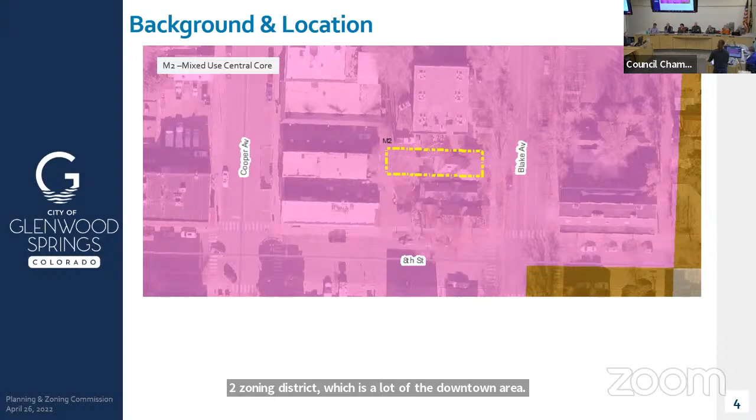And so just some background: this is the property location in yellow. Everything that pink color is the M2 zoning district, which is a lot of the downtown area—mixed use central core, so residential and commercial uses. And then this is just the same image without the zoning, so you can see it's next to the Manor building.

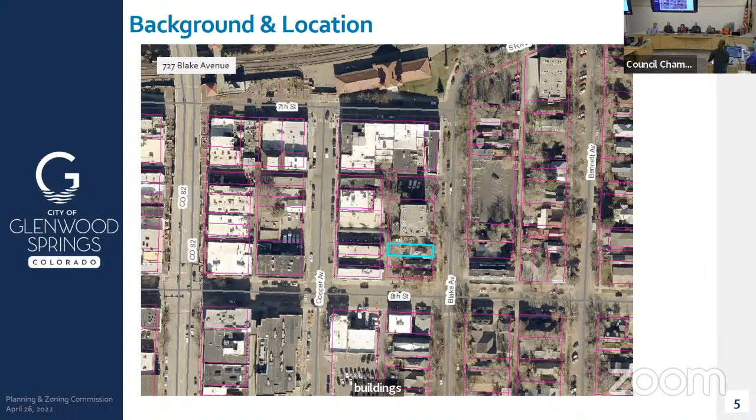Anyway, one of the taller apartment buildings. 727 Blake. So one thing about this application is this structure has already been built. It's noted that in your staff report.

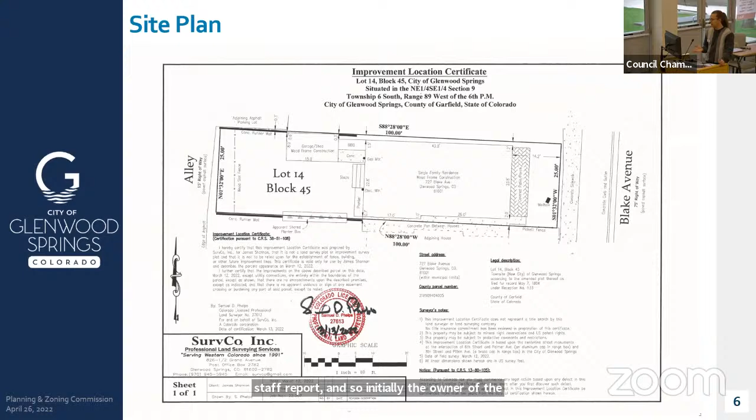Initially, the owner of the property approached city staff and asked about building an accessory structure, a shed, in this location. This is in the M2 zoning district, and here's a picture of it.

That's for primary structure. Accessory structures are held to their own specific setbacks, which includes 5 feet from the side. So the owner asked staff where he could place his shed, and staff explained you can put it right up to the lot line in the M2 zoning district. This shed is smaller than the size required for a building permit. Based on that response from staff, the owner in good faith went ahead and built the shed.

Later on, through further staff review, we found that since it's an accessory structure, it technically still needs to be 5 feet from the side setback, which is what prompted this variance application, because it would need to be officially approved to be there. Otherwise, it would not be.

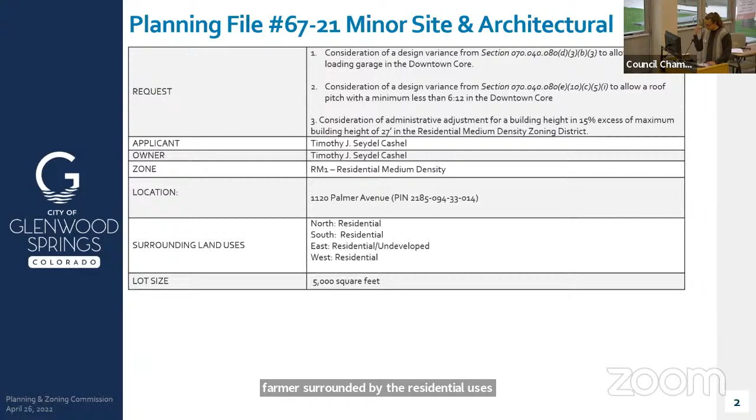This property is located at 1120 Palmer, surrounded by residential uses, and the back is undeveloped. It's zoned RM1. We're going to have 3 different action items, so I'll go through this presentation, present all of it, and then you take each item as it goes. Again, similar options: approve the item with suggested conditions, approve with additional conditions, deny with findings, or continue the item.

For action item 1, the front-loading garage, staff has recommended approval with suggested findings and conditions on pages 14 to 17 of the staff report. For action item 2, considering the design variance for the roof pitch, staff also recommends approval with findings and conditions on pages 14 to 17 of the staff report.

Then action item 3, which is considering the administrative adjustment, staff recommends approval for the administrative adjustment, suggested findings and conditions on pages 14 to 17 of the staff report. And I'll get more in depth on each of those in a second.

So the project summary is on this property. There's currently a trailer. An applicant proposes to build a single family home with an attached ADU on the property. The property is located in the RM1 zoning district, and is also subject to downtown core associated design standards. The downtown core is any property that is part of the original town site of Glenwood Springs, when the city was founded and they platted all the original lots.

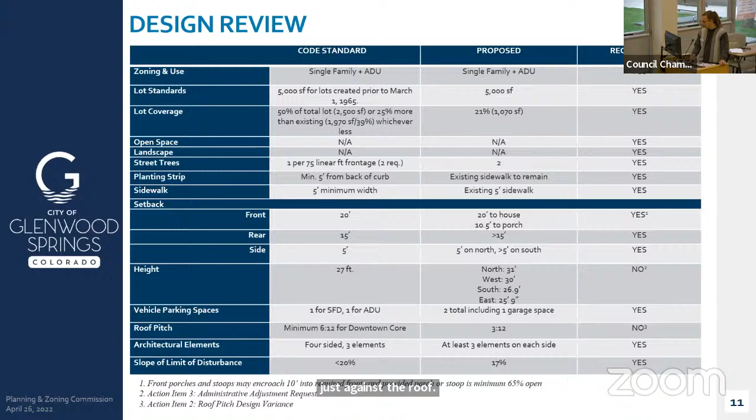And then number 3 is just again the roof pitch. So all these other items staff reviewed. I think I forgot to mention, I'll get to it when we get to the administrative adjustment part. One thing, a lot going on with this one, so one thing at a time.

So with the design variance, how that is different than a regular variance is you do have 9 criteria. However, they are split into 2 sections. You have section A with 3 items, and you need to meet all 3 of those. Then there's section B, which has 6 items, and you need to meet 4 of those. So it's all three of the first one, and then at least 4 of the second set.

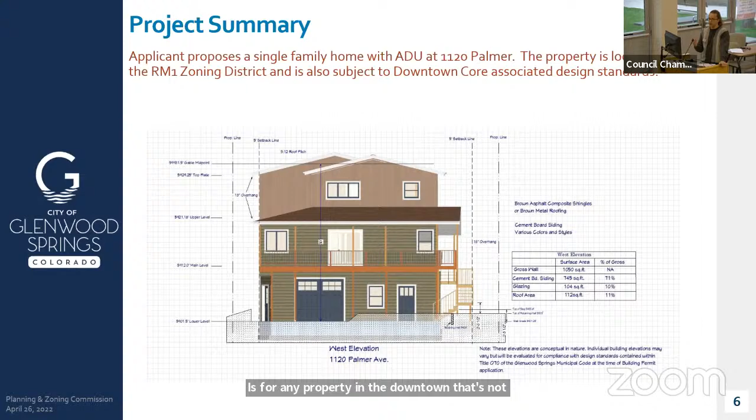And for this particular standard, this is considering a design variance to allow a front-loading garage in the downtown core. Go back to the elevation. So what that would be is, this property, you access it from Palmer and you have your garage that is front-loading. For any property in the downtown core, that's not allowed. So that's what the variance request is asking for, just having a front-loading garage.

Typically, so you can see here, the code, the intent of code is that you would have a rear accessing garage from an alley, which this property, there is no alley, and it just pretty much stops before you hit this property, back to this property.

So the actual criteria here, section A: the variance requested does not harm the public safety or welfare. Staff found that it does not harm public health, safety, or welfare. And then 2, the variance requested is in general conformance with comprehensive plan and with the stated purpose and intent of the code for which the variance is sought. So staff found variances in conformance.

Redevelopment of this lot with an ADU meets the following comprehensive plan goals: direct development to locations and building forms that are cost effectively served, and provide housing opportunities for the entire community. Staff also found the intent of the code, which is to require alley access, is not possible or practicable in this location because there isn't an alley. And the variance requested will not violate building or fire code requirements.

So that's section A. All three criteria need to be met, and staff found all three were met. Then you have section B, which has 6 criteria, and staff found that in this case, 5 of the 6 were met.

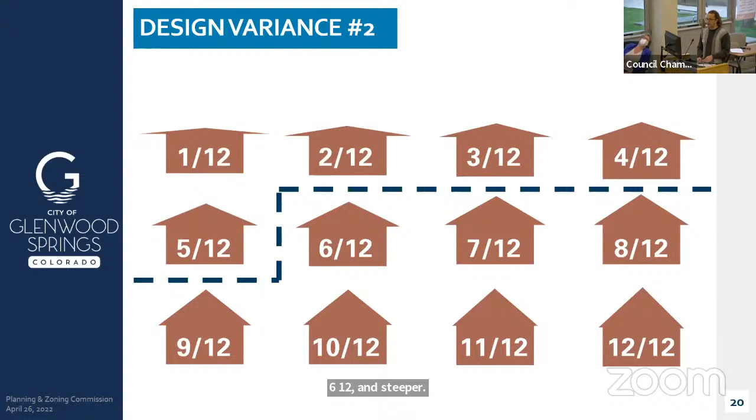Now action item 3 is an administrative adjustment. Typically an administrative adjustment is reviewed by staff — for example, when the code standard is a building height of 27 feet, the administrative adjustment would allow for 15% past that standard, and it's typically reviewed and approved by the director. But because this administrative adjustment is included in an application with other items before you, it's reviewed by Planning and Zoning Commission, which is why you're hearing this particular item.

The maximum height in the zoning district is 27 feet. The additional 15% would allow for a building height up to 31 feet, measured from grade. You can see it called out here, facing Palmer — it's measured from grade to the midpoint of the gable, the highest gable.

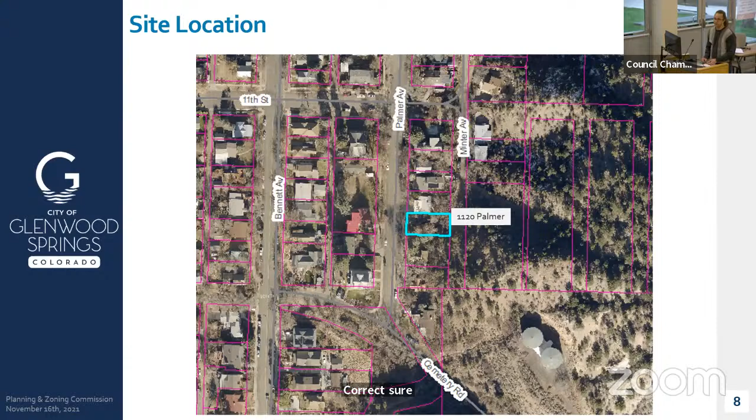Okay, Jim, please. Is the current use non-conforming to any degree? Yeah, so the current use - if you can see on the site plan, you can see the dashed line of where that existing trailer is. So the existing trailer is actually in the front yard setback, as far as the structure. And no other non-conforming issues? Yeah, so the shed would also be demoed, and then - yeah, so you have front setback for the primary structure, side setback for the accessory structure, both of which would be demolished. Okay, I appreciate that. Well, and I guess the front, we have the existing curb cut, so that - right.

Okay, this is intended for all of staff. If this were only an administrative adjustment, would you have been inclined to approve it? Yeah, again, it's two of the 4 elevations, and it's within the 15%. This is kind of designed for this fact that we got graded differently, and how we measure height. Okay, yes.

I only have one other question for the applicant when we get a chance to meet them. Other than that, thank you.

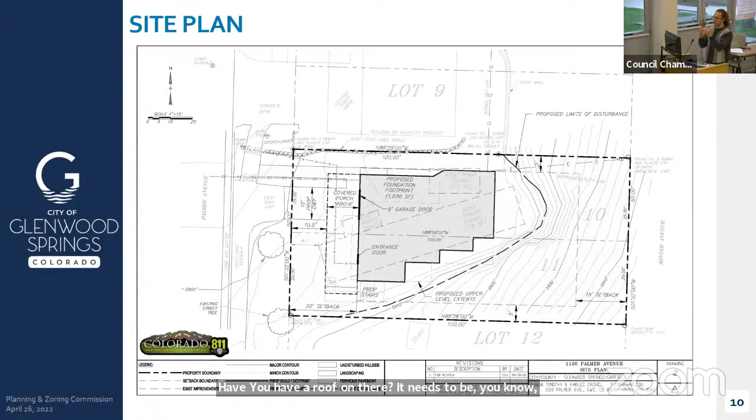Okay, so in the future — again, you can see it's open deck railing. If in 15 years someone wanted to fill in with actual walls, it would no longer be an open porch. It would be a closed porch, which could not go into that setback. Got it. That's the open porch, allowed 10 feet, but if you close that, it's no longer a porch.

Okay, thanks. Pete: Good staff report, Emery.

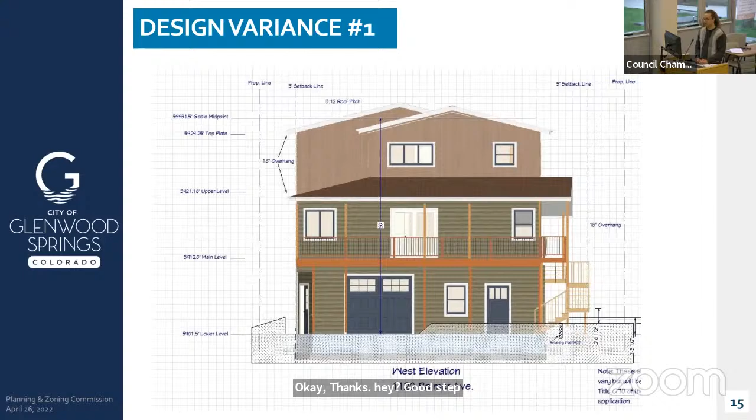So on variance 2, the roof is less than 6:12, and I think your justification was good. I'm good with that, but it's 3:12s.

And I guess my question is, we wouldn't make that be a code change because you'd look at each individual location, since here you looked at the neighborhood — next door there's a flat roof, and a 3:12 across the street. So this is consistent with that, but let's say it was downtown on Blake or somewhere like that — could that be a different outcome?

Yeah, I would say so. The downtown core has a whole paragraph that speaks about comparing it to existing structures on the block face. So if we took the same project and put it on a different block in the downtown core, we would want to look at what's already there. So that would be evaluated.

So that's why you'd stay with the 6:12? Yeah, okay, thanks — so keep the standard. Yep, that makes sense to me.

On previous applications there's been discussions, and I think there was some verbiage in your report about stepping down architectural features. I believe you were saying this design meets those standards, so there was no reason for a variance in that regard. Correct, so...

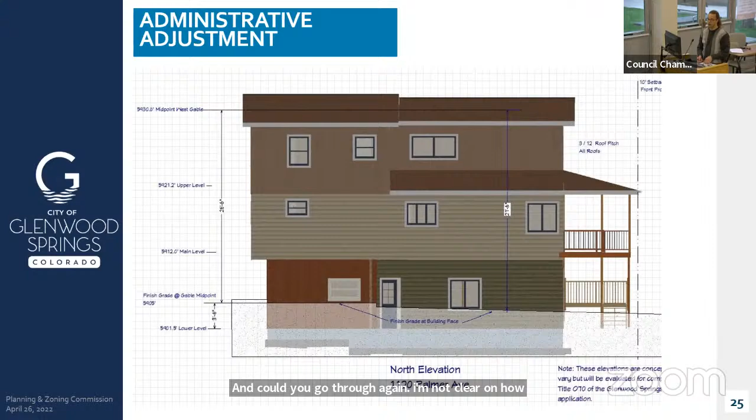Okay, and could you go through again? I'm not clear on how the height is calculated — it's not from existing grade?

So let's bring up the other elevations so you can see each one. We'll start — okay, so if you're standing on Palmer, grade is taken, so this is grade, where the driveway is. It'd be finished grade. So from finished grade to the midpoint of the gable, which is over 27 feet, requiring an administrative adjustment on the west.

So then we come around to the north side of the building. This is a finished walkway, so there is some grade above it, but since this is kind of a continued grade from that front level, it's a paved path coming off the driveway — that's where we took grade from. So again, on this elevation, it also exceeds that 27, which is requiring the administrative adjustment.

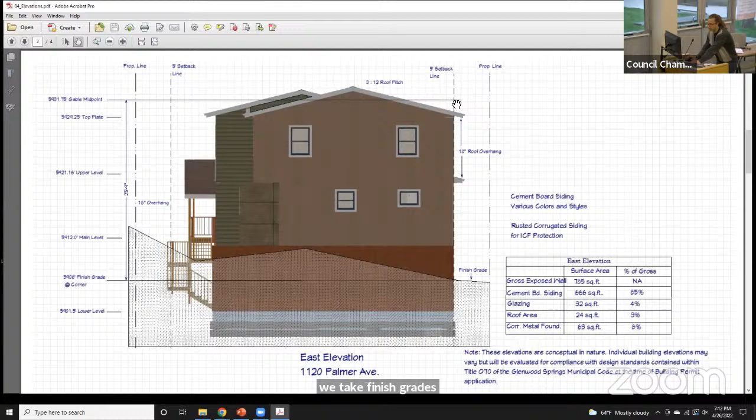And then as we go to the back of the house on the east, we take finished grade — we actually took from this corner and went to the midpoint. That was under 27 feet. And similarly on this side, it's taken from this point, this grade, to the midpoint — that was also under 27 feet. So again, you're looking at north elevation and west elevation.

So it doesn't apply to this project, obviously, but what would prevent somebody from going in and filling a lot and building on top of that rather than computing from existing grade? Maybe that's a discussion for another time.

No, it's a good question. The way that we measure is from the finished grade, not existing. Which I don't know any other district that does that. Do you, Pete? I mean, I know the county doesn't — Garfield County and Up Valley, they don't. It's always a matter of contention for me.

Yeah, okay, just a discussion for another time — there's a lot of stuff on this as well. We could ask Patty — what do you think, Pat? So I guess we wouldn't even be discussing this issue if it hadn't been attached to the request for the variance anyway. Okay, that's what I wanted — so there, that was a rhetorical statement.

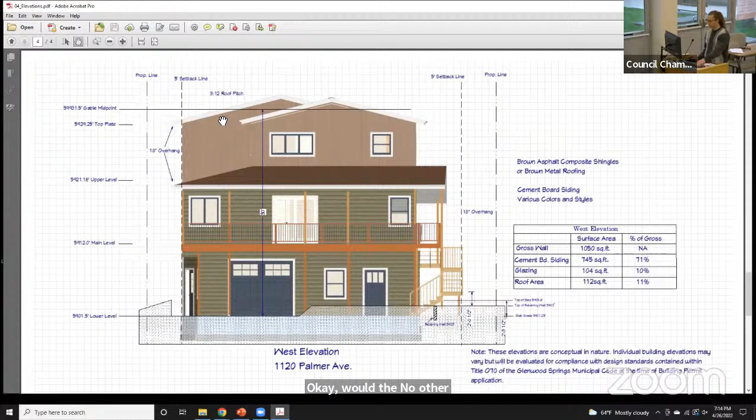Okay, would no other questions up here? Would the applicant care to come forward and present their project?